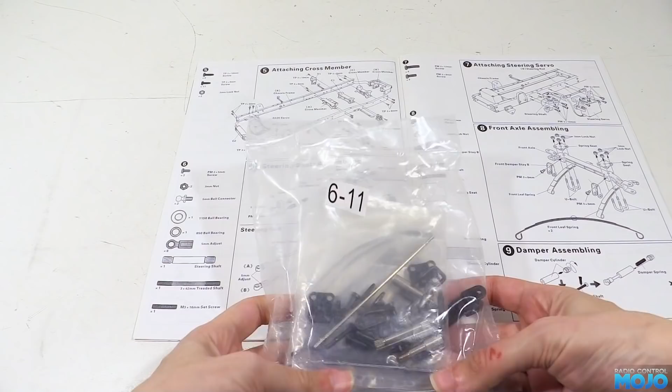We've got the second parts bag which covers steps 6 to 11, so let's see how far we can get.

In the bag we've got the front axle, and just like the Tamiya part it feels like it's cast aluminium that's been painted black. And we've got the dampers and the leaf springs.

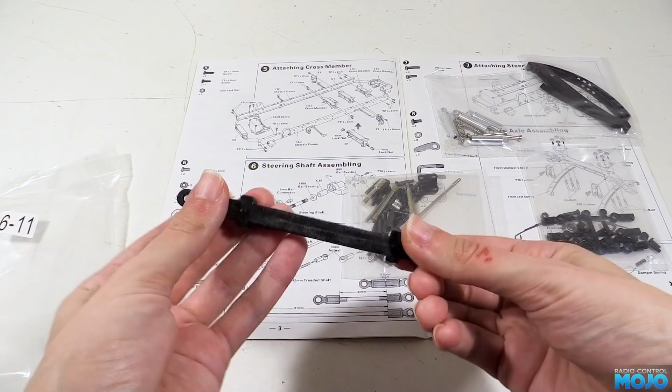Just like the last video, we'll pour the contents of the screws bags into some pudding pots for safekeeping. It makes the bits easier to find, and most importantly it helps against losing bits off the table. Incidentally, we have the first of the bearings in this pot. Unlike Tamiya kits, I don't think we're going to find a single bushing anywhere in this build.

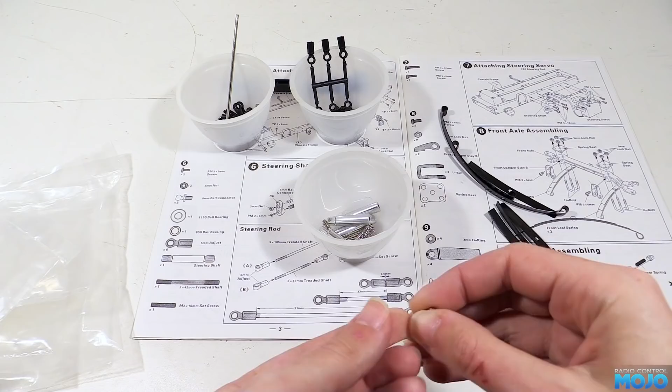When unpacking the leaf springs, they all come from the bag loose with two little aluminium bits. It took a while to figure out, but they should have been pressed through the centre of the holes in the leaf packs to keep them together. I'm guessing they got pushed through, but the ends never got flattened, so they just fell out. It's not a big problem, it just makes the assembly a bit more fiddly.

Here we go then, step 6, the steering bell crank. We'll need some plastic parts, and left to right we have C6, C16, C14 and C7 for the crank assembly, and we also need 6 plastic rod ends.

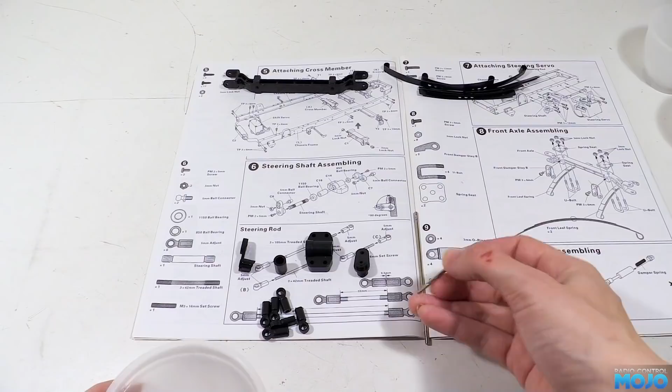For the steering bits we need 2 long rods. One's the steering drag link and the other one goes from the servo to the bell crank. 2 5mm ball ends, 2 M3 nuts and 2 M2x5s, the 2 bearings, the rod for the bell crank with its blind ends, and the M3x16 grub screw.

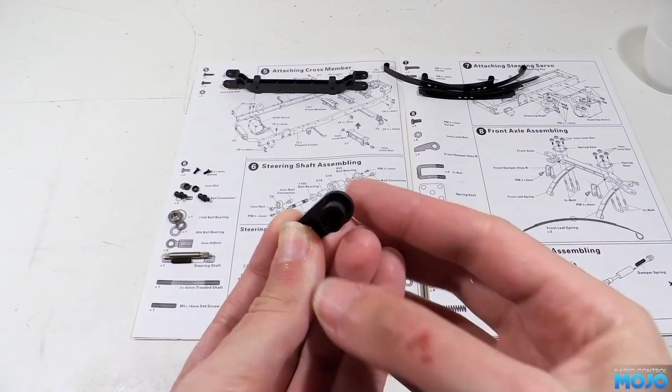Before we get building we need to tidy up one of the arms, C6. Around the base there's quite a lot of moulding flash that will get in the way. I suppose this is one of the disadvantages of the Hercules kit versus the Tamiya. You do have to keep an eye out. It only needs a quick trim with a knife though, so it's an easy fix.

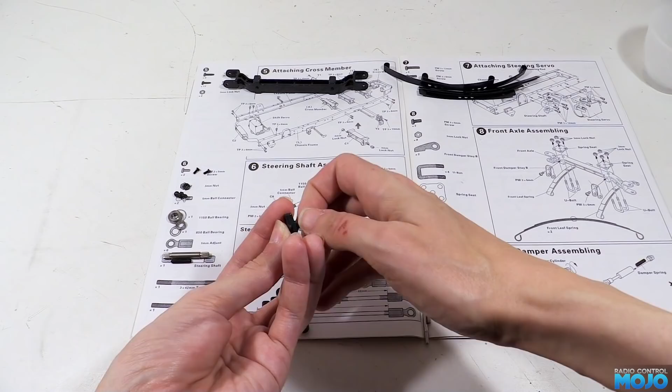Next, in the inner of the 2 holes of one of the arms we need to fit a ball end and nut. The nut goes into the hex-shaped hole side and the ball end goes in through the other. It's a plain nut, so we're going to use a little bit of thread lock just to make sure it can't rattle loose. To avoid getting any on the plastic, we can fit the ball end and the nut, then put a little bit of thread lock on the exposed threads on the nut side.

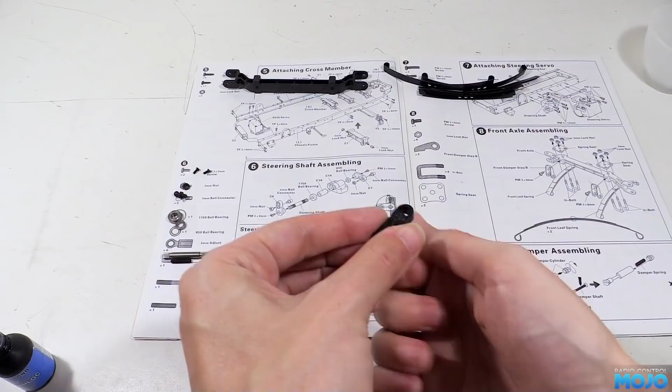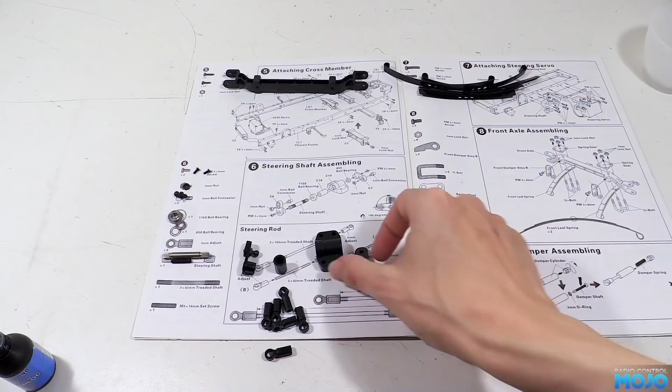Then we undo the ball end a few turns to get the thread lock down into the nut and retighten. All being well, there will be just enough in the threads to work, but none of it should make it down into the plastic. While we're fiddling with the balls, we might as well fit the ball end to the other arm too. It's only got the one hole this time, so you really can't go wrong.

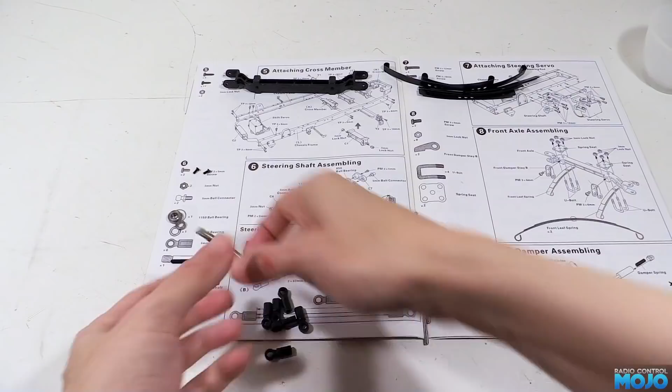Next we need to attach the C6 arm to the end of the spline shaft. The shaft has M2 threaded holes at each end, so before we fit the arm we need to apply a little bit of thread lock in the holes so we don't get any on the plastic. Just smear some around inside the threads with a cocktail stick and wipe off any excess around the ends.

Now the arm just slides on and one of the M2x5 screws goes in the end. It's all quite a good fit too. It's not super tight, yet there's no slop detectable.

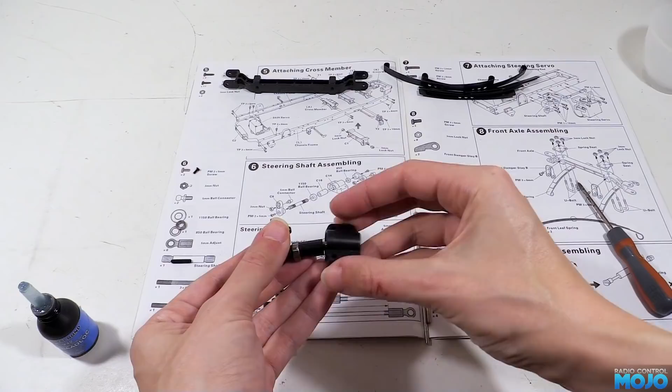Next on the shaft is the large bearing, followed by the long C16 spacer. The mounting block C14 goes over the top, and the small bearing slides over and presses down into the block. Lastly, the other arm C7 sits on top at 90 degrees to the other one.

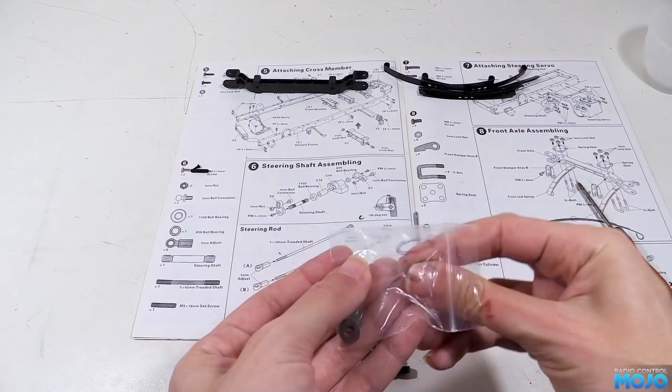But when the arms are fully pressed home, there's quite a bit of vertical slop in there that really won't help straight line performance. Off camera I did a quick compare with a Tamiya version from a High Lift, and it really is just as bad. So as we're coming to expect, Hercules have faithfully copied Tamiya.

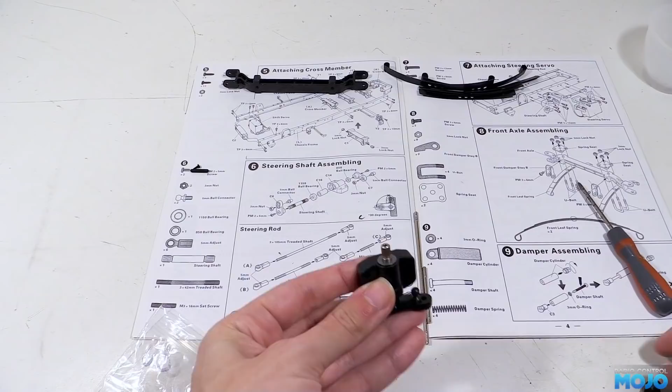To help, I'm going to fit a 0.5mm shim under the arm. It'll take out most of the play, making it run just that bit better. With the top arm in place, all we need to do is fit the second M2x5 in the top.

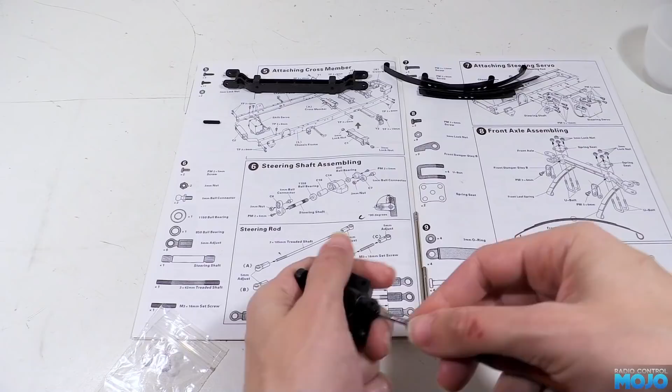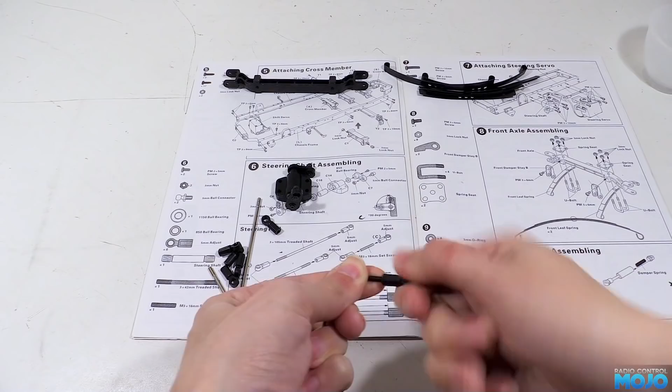Push rods next, and we'll have a quick look as they're not exactly complicated. There's 2 types of rod. The first one is just a long grub screw. All we do is screw it into one of the rod ends using an Allen key. We want to have it a bit less than halfway in. It's really not that critical though. When one end's done, we just screw on the other.

For the longer rod, we just grab the plain part of the rod with some pliers. But wait, if the rod skids in the jaws, it's going to damage the plating and it will rust up in no time. So we need to use some cardboard in the jaws just to add a bit of protection.

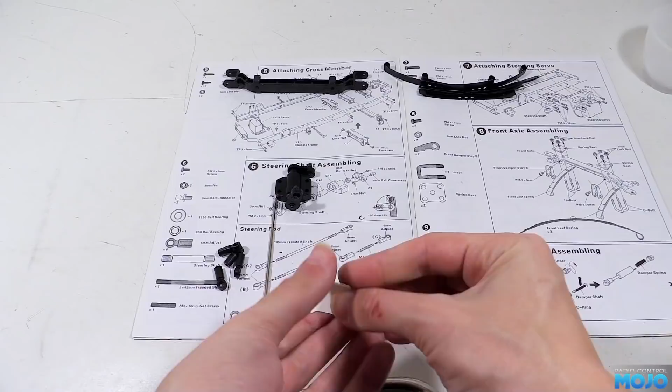The boxes the servo came in are a handy source. Usually with the Tamiya kits, those diagrams of the rods are actual size, so you can just hold the completed rod up and check the length.

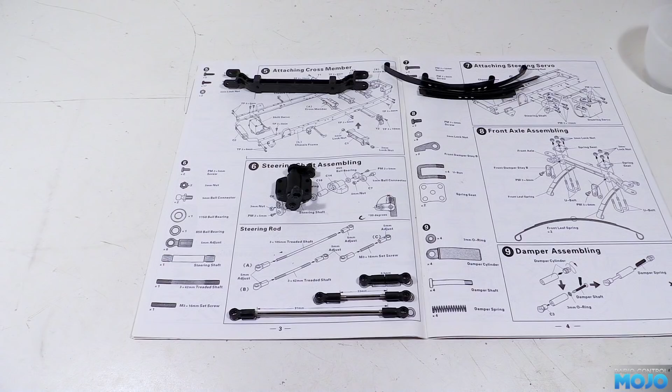But as you can see with these diagrams, they're a bit off. I'm not going to say that they've scanned in the Tamiya manual and didn't scale it properly, but they probably did. Anyway, you can use a ruler, or if you have a vernier, set it to the right length, 91mm for the long one, and set the rod ends to match. It's a bit more of a faff than it really should be, but it's not so bad.

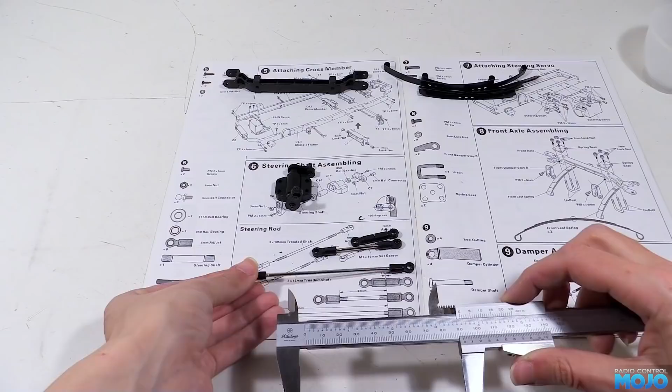Right, step 7, the steering servo. This one's quite simple, as we've already done all the hard work. To fit the bits, we need 4 M3x12s and 3 M3x8s.

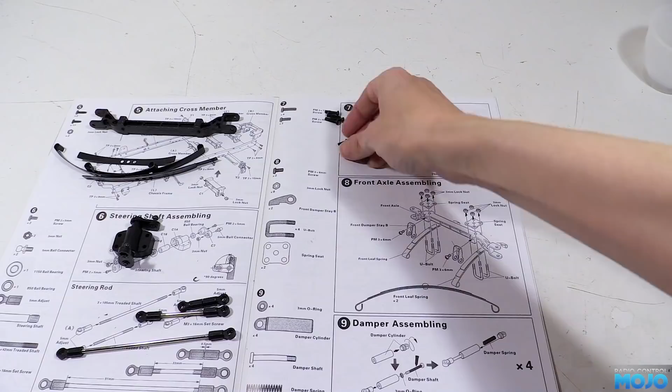First we'll fit the bell crank assembly. It fits on the side of the chassis just behind the damper mount, with the arm with the 2 holes at the top. To attach it to the chassis, we just install the 4 M3x12s. They just go through the mount into the threaded holes in the chassis.

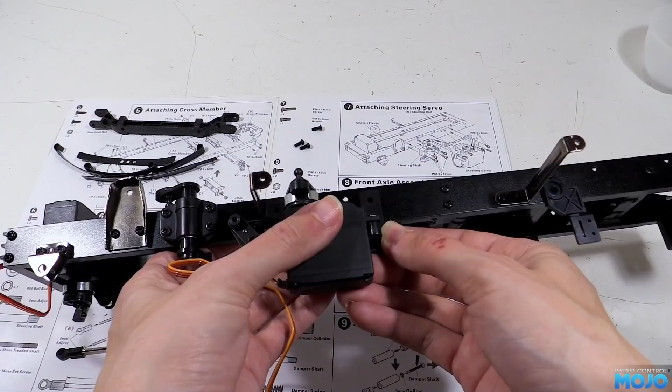A bit further back on the chassis we can fit the steering servo. Oddly, it uses 3 screws because the mounting plate has a notch in it to clear the side panel stay. We just need to install the screws. It would probably be a good idea to use a little bit of thread lock too.

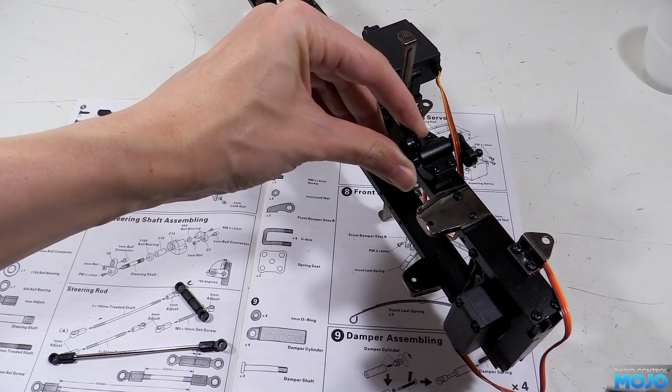The last part of this step is to install the middle-sized linkage between the servo arm and the bell crank. All you need to do is line them up and give the rod ends a bit of a squeeze with some pliers. Now it looks like it's going to work well enough, but there is however absolutely zero slop, which usually would be a good thing, but in this case it's because the rod ends are very stiff on the balls. We'll have to see how the other ones are, but we might end up needing to change them before running the truck.

Step 8, the front axle. Now the axle itself is a single casting, so that's ready to go. What we need to do though is sort out the leaf springs.

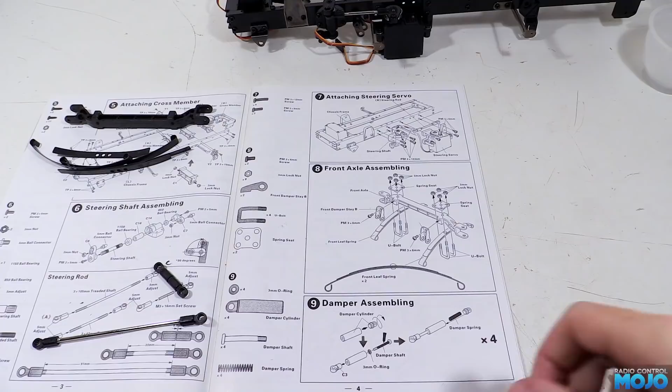As mentioned earlier, the leaves should be pinned together with these little aluminium rivets. If we stack one up, we can pop the rivet through the middle hole. To keep it in place, we might be able to give it a squeeze in a vise, but it's really not worth the trouble. Also a bit of a problem, you can see the 2 shorter leaves are almost completely flat.

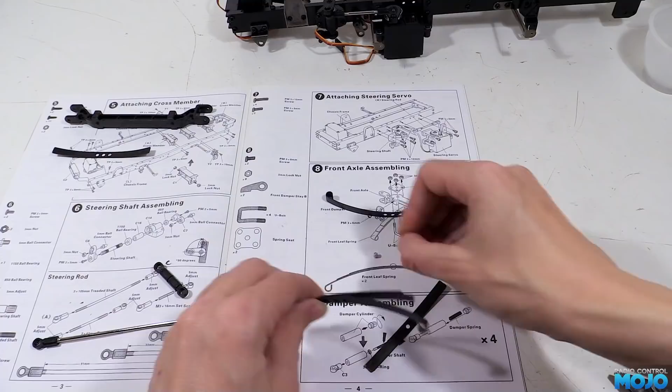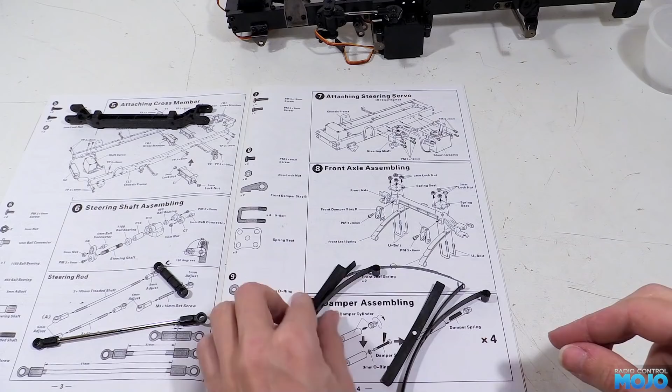They're really not going to do much in terms of actually being springs. We could have a go at putting some more curve on them, but they're spring steel, so that would be a bit tricky for a start, and they have holes in the middle, so it would be all too easy to put a sharp bend right where the hole is.

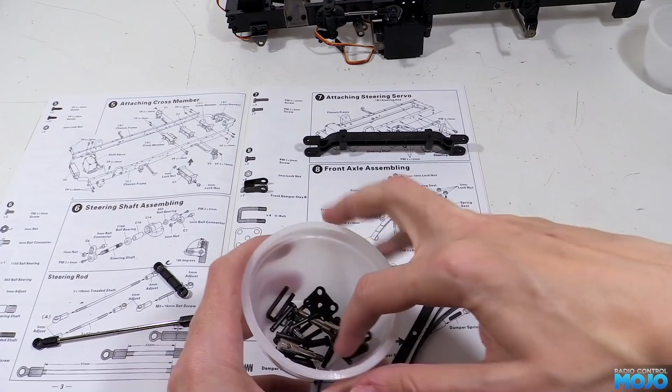I think for now we're just going to build as is. The worst thing that's going to happen is the truck's going to ride a bit low, but maybe having that lowered look might suit it. And of course, worst comes to the worst, I think I've got some Tamiya leaf springs somewhere that would be a straight swap.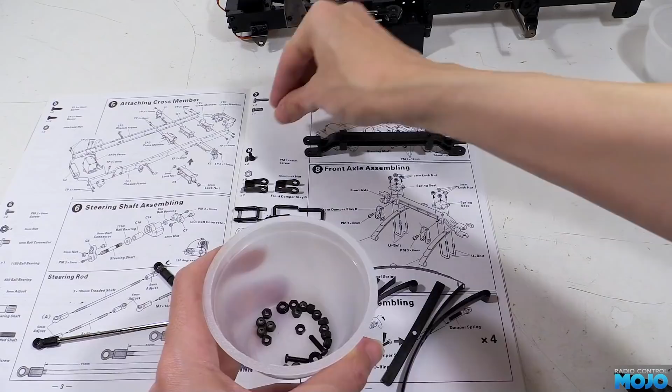Other than the leaf springs and the axle, we also need the 2 lower damper mounts, 4 U-bolts, and the 2 plates that act as the spring seats. For attaching things, we're going to need 2 M3x6s and 8 M3 nylon nuts.

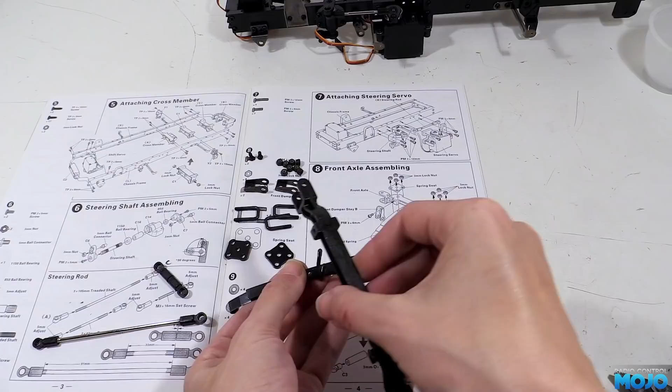Now, because the spring packs aren't riveted together, the hardest part of this stage is going to be stopping them from falling apart while we get the U-bolts on. We need to very carefully hold the first pack together with the U-bolts held up in position with a finger. Pop the axle on top, followed by 1 of the plates and 2 of the nuts. We only want to do the nuts up finger tight for now, just so it doesn't immediately fall apart.

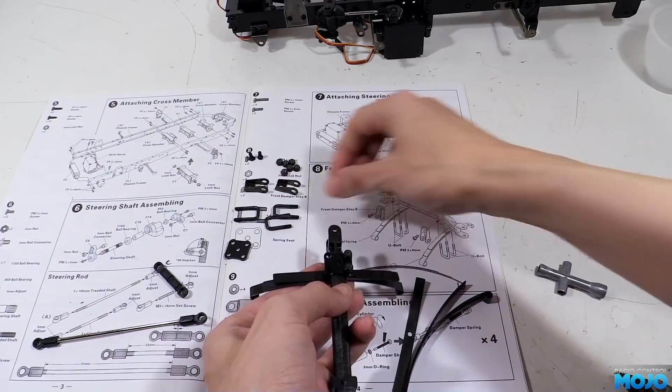Now we can feed the second U-bolt up and around the spring and up through the plate so we can install 2 more nuts. Tighten up the nuts until the U-bolts are just starting to get a good grip on the springs. We want them so we can still just about move the spring so we can centre them up.

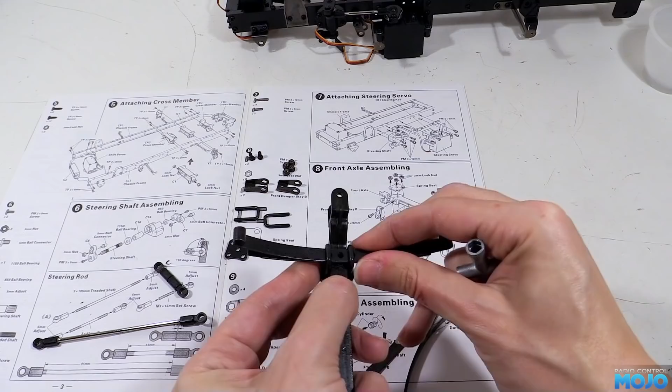Now normally the rivets would sit in recesses on the axle to locate them, but without the rivets we're going to have to jiggle them around until all the centre holes line up. Thankfully, you can clearly see them, so we don't have to measure anything to get them spot on.

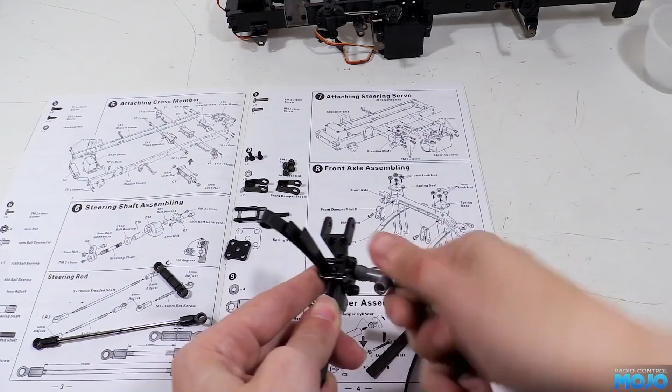I found the nuts bottom out on the U-bolts when the tension is about right, so as long as you don't use too much brute force, you can tighten each nut at a time just until they stop. Having said that, we might end up needing to loosen them a bit to get them to sit nicely in the shackles when we fit the axle to the chassis, but we'll deal with that when we get to it.

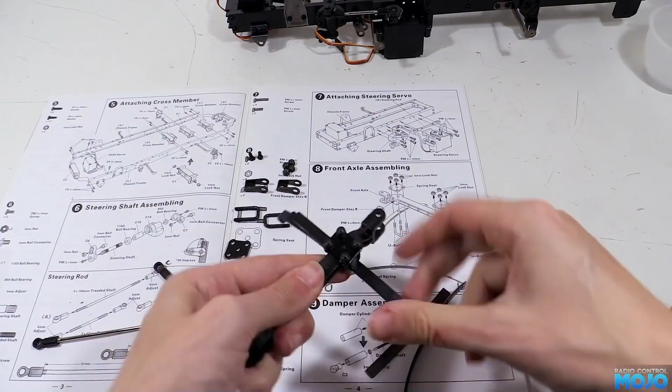You never know, they might just drop straight in. As you might imagine, the second leaf pack is exactly the same, so we will just cut to that one being fitted.

Next we've got the damper mounts, but before we fit them we're going to smear a bit of thread lock in the holes. The holes are on the flat face directly above the leaf springs, if you have the axle upside down. We just need a bit of thread lock on a cocktail stick just to get it in the hole. Now we can install the damper mounts.

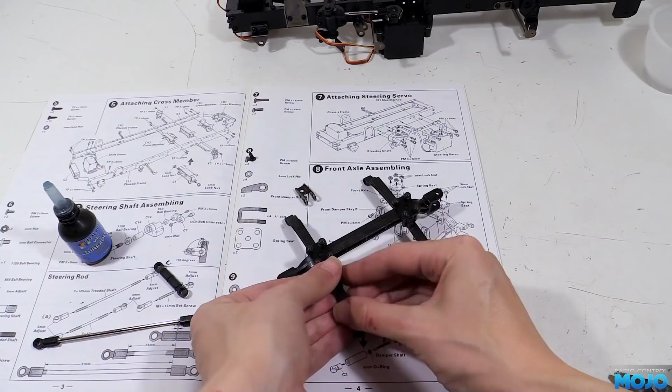They should straddle the leaf springs, so they're going to help square up the leaf packs. Now this hasn't been the best bit of the build so far, a bit more faff than it really should have been. We're going to leave it as it is though, and see how it does when the truck's finished and the springs are loaded up. You never know, they might just be fine.

Step 9 next, we've got the dampers that don't actually damp. Right, we're going to need the 4 bodies, 4 caps, 4 clear O-rings, 4 shafts, and 4 springs. Now usually you don't really need the coil springs as the leaf springs are more than stiff enough on their own, so we'll just leave them out.

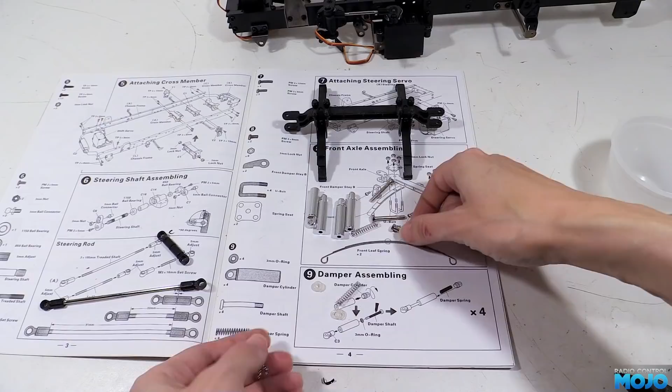However, we might end up fitting them later due to the malformed leaf springs that might not hold up the truck. And of course for plastic bits we're going to need 4C3s. These look a lot like ball type rod ends, but the holes are actually parallel to run on a post rather than clip on a ball.

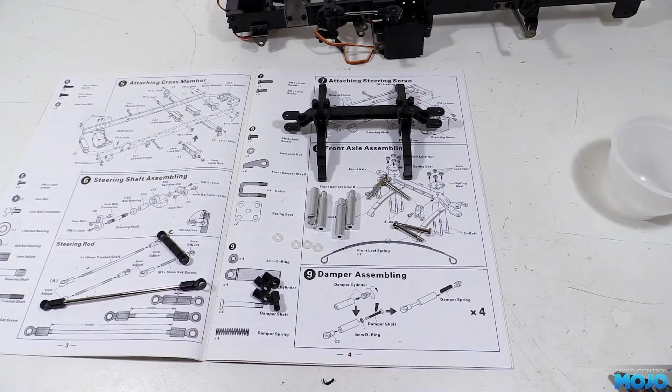The caps are already fitted to the body, so the first thing to do is unscrew them. The threads are nicely formed, so they come off without any fuss. Next we pop an O-ring over the shaft and stuff it in. Now it will be difficult to get it past the threads, and it will probably damage the outside of the O-ring.

But these aren't oil dampers, so they don't need to have a good seal. The job of the O-ring is to have something to slide up and down inside that isn't going to wear like metal. With the shaft inside the body, we can install the rod end.

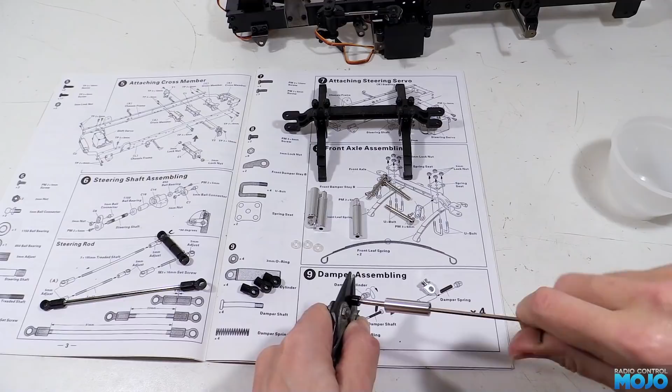It's easier than most dampers because the end of the shaft has a hole for an Allen key, so there's no trying to grab the shaft with pliers. Although with this, you might actually want to grab the rod end with something. Next the cap goes on. Now it doesn't need to be incredibly tight, just bottomed out plus an extra little tweak.

Now that should be it, but pushing the shaft up and down I found it felt a bit grabby. It feels like the end of the shaft is struggling to cleanly run up and down inside the body. It's an easy fix though, we just pop the cap off and put a spot of fairly thick oil in. It doesn't really matter exactly what it is, just don't put much in. We want it to coat things, but not drain out through the bottom making a mess.

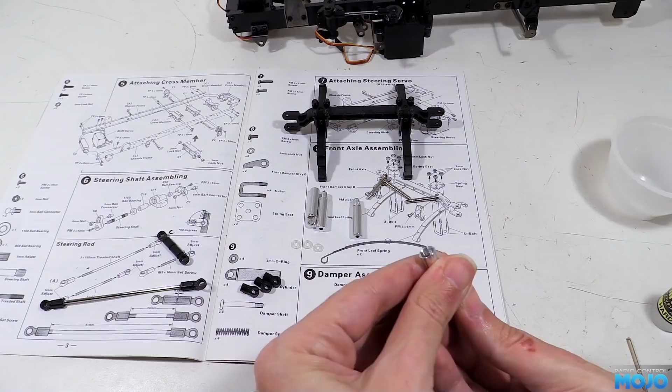Or you might get away with a fairly light grease. But if it's too thick though, the damper will probably squirt it out past the O-ring on the bumps. It needs to freely pass the flat on the end of the shaft. Anyway, repeat 3 more times and you've got a complete set of non-damping dampers.

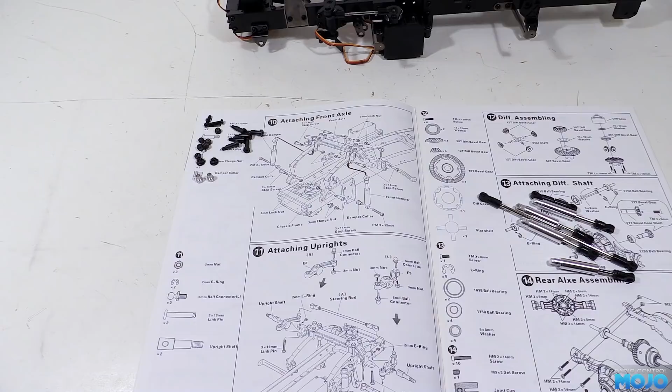Step 10 next, hanging the axle and fitting the dampers. For fixings we need 6 M3x14 step screws, 2 damper collars, 2 M3 flange nuts, 2 M3x12s and 6 M3 nylocks. From the assemblies we've already put together, we need a pair of dampers, the front axle and of course the chassis.

The axle goes in with the damper mounts towards the front, and with any luck the ends of the leaf springs will nicely drop in between the shackles. If they don't, you would just need to loosen the 8 nuts on the U-bolts, let everything settle and retighten.

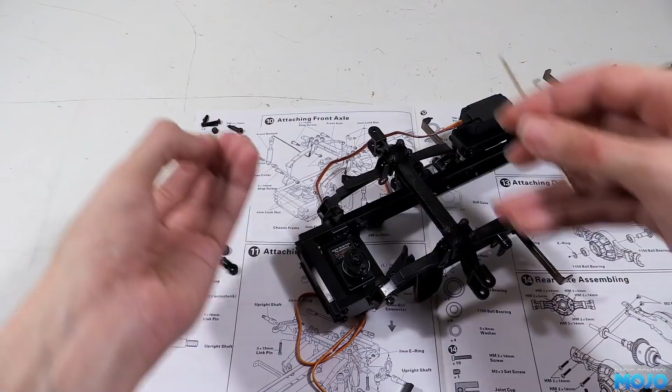Starting with the fixed mounts at the front, we need to pop in a step screw from the outside. Pop both screws in first, as it makes everything a lot more stable so it's easier to manage. To stop the screws coming out, they just need a nylock fitting on the inside. For now we'll just do them up finger tight until all the rest are in too. The shackles get the same treatment. We want the shoulder screws from the outside and the nylocks on the inside.

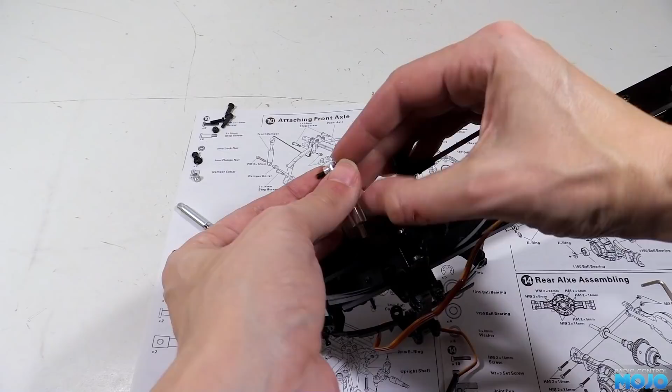Next we'll fit the dampers. They use the long M3 screws and the damper collars with the flange towards the damper mount. They're a little bit fiddly to get in without dropping the collar, so try not to lose one in the carpet. On the back to hold them in we use a flange nut.

Now these have teeth on the flange, so they shouldn't really need any thread lock. And besides, we might need to retrofit those coil springs if the leaves are too soft, so keeping them easy to remove might be a good idea.

At the bottom, the plastic ends slot into the metal mounts on the axle, and we use another step screw from the outside and a nylock from the inside to keep it in.

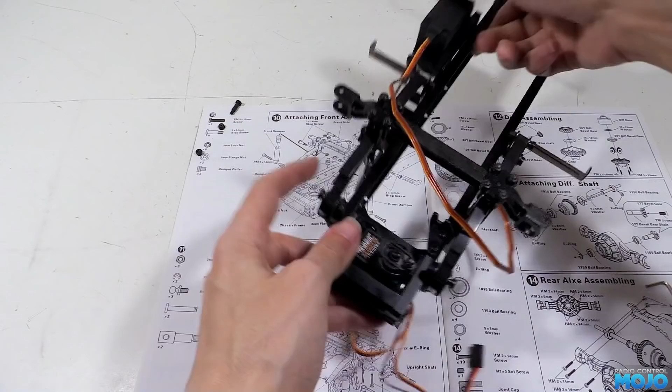When you're happy with how everything fits, the leaves are aligned and they all move nicely, go around and tighten up all the screws and nuts. You should be able to bottom them out on all the shoulder screws and still have enough clearance for smooth operation. If something's sticky, pop the screw out and find out why.

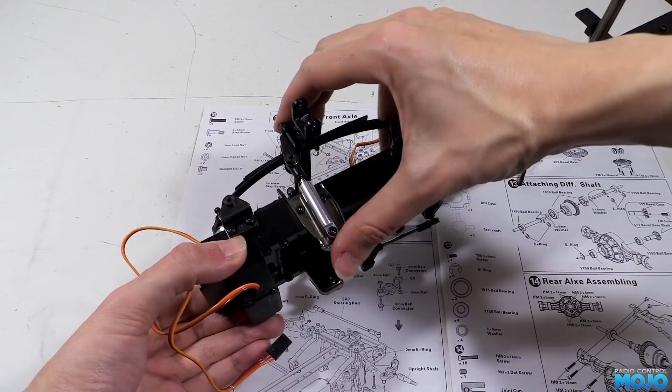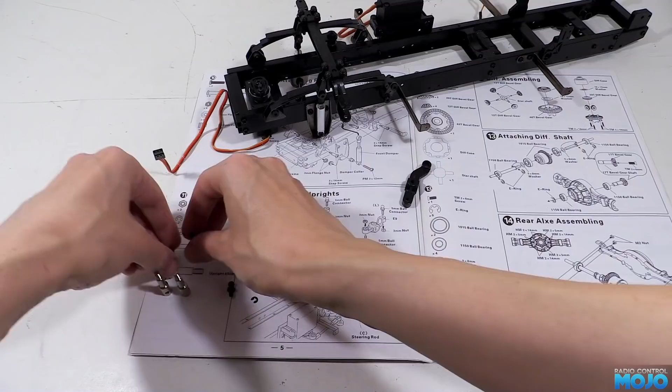Step 11. Fitting all the steering bits. We'll need the hubs E8 and E9, the 2 upright shafts, 2 link pins, though I think I'd tend to call them king pins, 3 5mm ball ends, 2 E-clips and 2 M3 plain nuts.

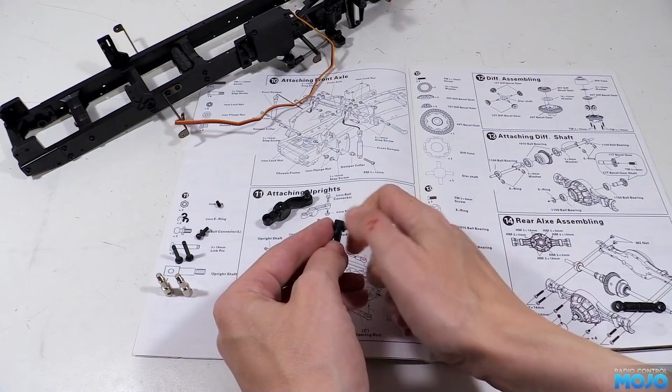On the long ends of the hubs there's a hex-shaped hole for a nut. On the other side we need to screw in one of the ball ends. Now it might be a good idea to use a little bit of thread lock, but there's really not much plastic around the nuts, so if it gets contaminated they will break very easily. If there's enough thread on the screws, we might get away with replacing the plain nuts with nylocks.

On E9, the hub on the right of the diagram, we also need a ball end fitting to the short arm. Again, there's a hex-shaped hole for the nut, so it's really easy to do.

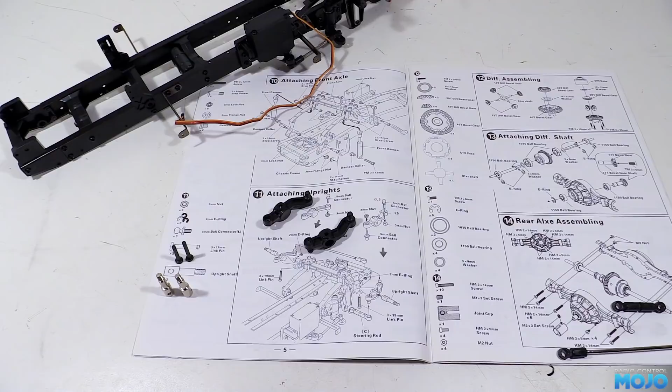I found one of the holes in the hubs for the kingpin had some moulding flash in. Pressing the kingpin in partially dislodged it, and running the knife around the inside cut it free. It's very important to make sure all the parts are nice and clean. Now I must admit it's not something I've ever really seen with Tamiya kits. They're always near enough perfectly moulded.

In the side of the hub we need to fit one of the upright shafts. On the large end there's a hole that should line up with the holes in the hub. They're going to be running on metal kingpins, so they're going to want a bit of grease.

I'm going to use some of the grease that came with the 3Racing EX-Real. Now, I'm pretty sure it's a lithium grease, but any fairly light grease will do here. It's just to coat the surface so they move freely without catching.

Next, the hub assemblies slide into the end of the axle with the long arm towards the front. Now unfortunately that is indeed backwards. When Tamiya designed the Euro trucks they obviously couldn't get it all to fit, so they flipped the hubs. It works, but the Ackerman angle ends up in reverse, so the outside wheel is going to steer more than the inside.

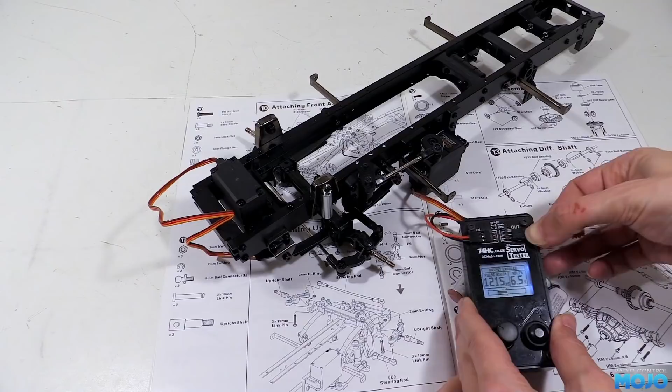Anyway, all we do to fit the hub is slide the kingpin in through the bottom and clip on an E-clip. If all goes well, the hub should smoothly turn on the kingpin without binding. Repeat on the other side and we can move on.

Interestingly, these hubs seem to have a lot less slop in them than the Tamiya ones, but I think that might be luck rather than design.

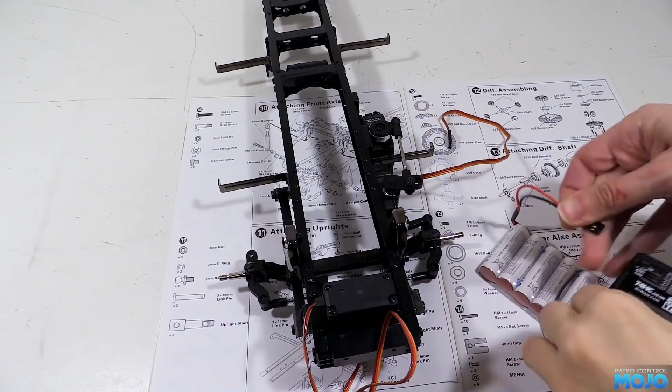Just a couple of bits left to do. We need to clip the short linkage between the lower bell crank arm and the short arm of the nearest hub. Access is a bit tricky, so you need to be careful not to stress the hubs too much. It really wouldn't be difficult to snap one of the arms off. Same goes for the long link that ties the hubs together.

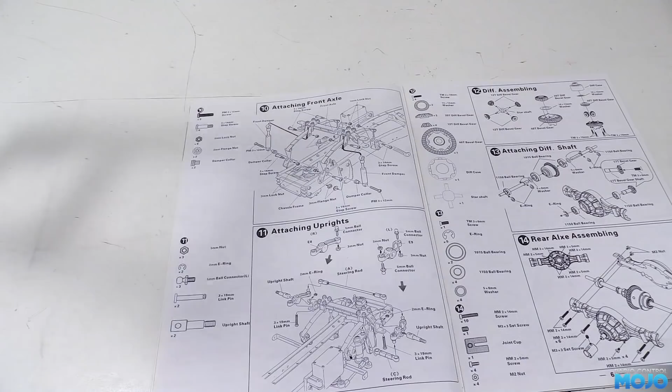Right, time for a test. If we hook up the servo tester again, we can see how it all works. It's worth noting all the ball ends were very stiff. So stiff the servo struggles a bit to centre, which really isn't good.

Off camera, after I'd filmed this, I popped one of the rod ends off and tried a proper Tamiya equivalent, which worked a lot better. It's almost like the Hercules parts are just slightly undersized. You can get a pack of 6 Tamiya ends for a few quid, so it's going to be worth getting a set. The Tamiya part number is